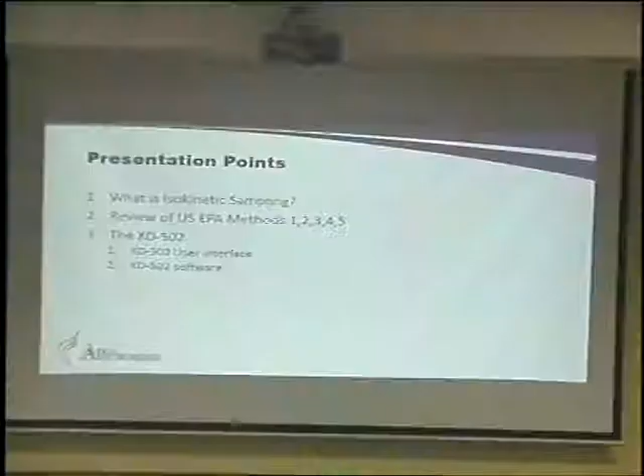So we can get started. For the first session this morning, I'll do my best to speak as clear and slow in English as possible, on the original Method 5 theories and practices. You must have a basic understanding of Method 1, 2, 3, 4, and 5 to be able to do more sampling, maybe Method 23 or 26A or 29, things like this. So we'll review those methods, and then we'll take a look at the new console we have in the back here, the 502, which is a small, light, compact version of our original manual sampling equipment that we have developed over many years with feedback from our customers all over the world, looking for new technology, new improvement on the equipment.

So first of all, let's talk about what isokinetic sampling is. To break down the word itself, ISO is uniform, or same, or equal to, and kinetic is pertaining to the motion, or in our case, the flow. So isokinetic sampling is basically matching our flow or suction with the instrument to the flow of the stack gas. Why do we do isokinetic sampling? It's to provide an unbiased representative sample of the particulate matter emitted from the source. So when we withdraw the gas at the same speed that it is flowing through the stack, we can then determine the total emission rate coming from that source.

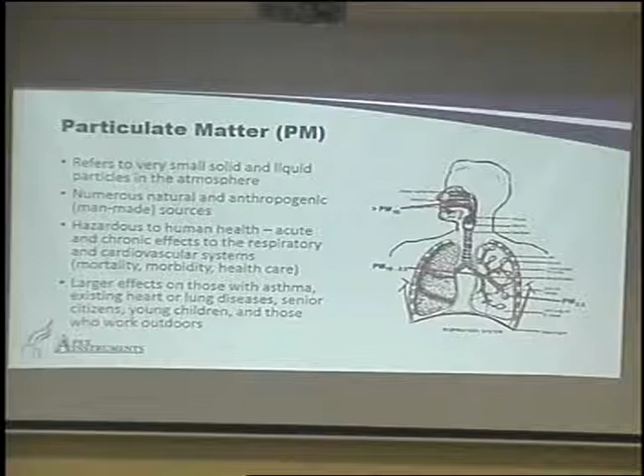So this helps generate pressure on industry and on the government to improve sampling regulation, to do more of it, to determine how we can lower that PM2.5 number. There are several sources where that may come from - maybe vehicles, maybe the burning of farmland when crops are changed, things like this. Obviously here in our industry, we're looking at stationary sources, chimneys, factories, things like this, that contribute to that PM2.5 factor. So we can talk about that a little bit later on.

So, isokinetic sampling - I won't go into the mathematics too much today. If you have any questions on the calculations, I'll be happy to answer it. But let's make sure we understand the theory and the topic today and what needs to be done for an accurate sample. The key is accuracy here, because if we're not taking an accurate sample, the data is meaningless, and then maybe we're making decisions on incorrect information, and we're not improving the situation as we think we would like to.

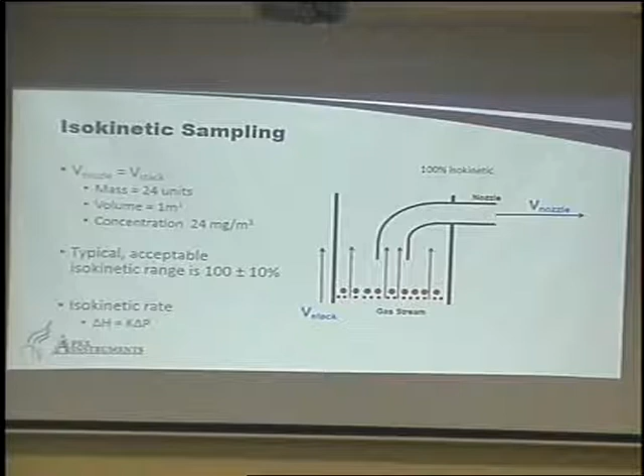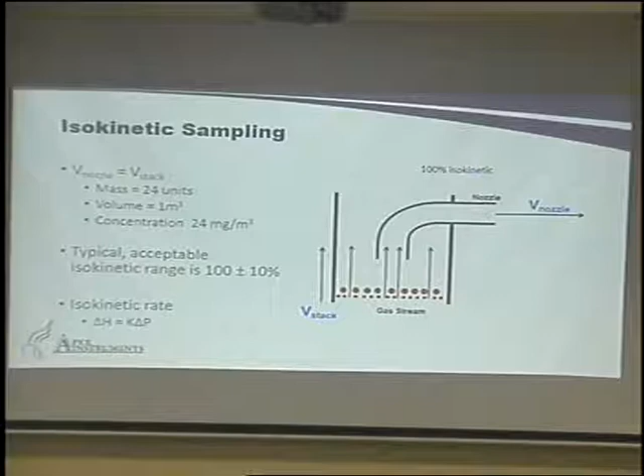So we're looking here at 100% isokinetic sampling. This represents our nozzle here on the end of the probe. Over here on our system, we match how much gas we suck into the nozzle with our pump. So we're going to draw our vacuum, and how much gas we pull into the nozzle here is going to equal how fast the gas is flowing past that nozzle, okay?

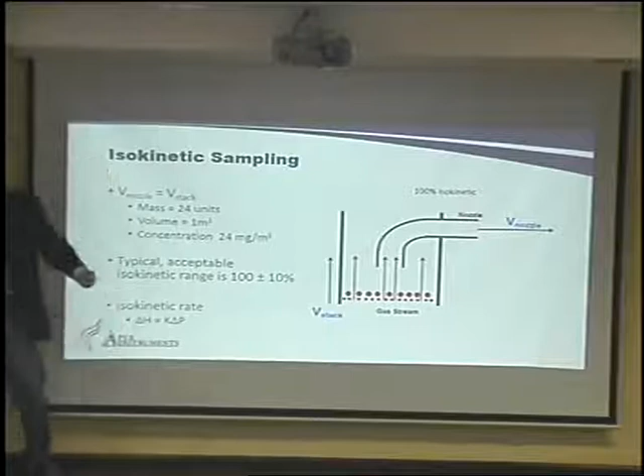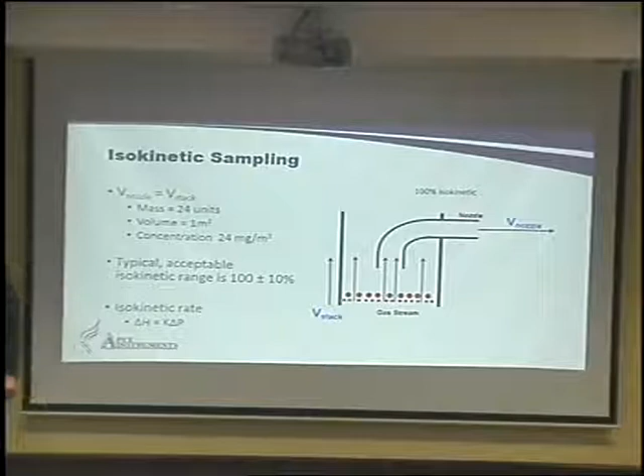And we're going to use several parameters to make sure this is accurate. Our pitot here reads how fast the gas is coming towards this. So we need to do all of our calculations. In the US EPA regulations, it says a valid test is - our isokinetic rate will be our delta H, which is the gas leaving the back of our gas meter. That is going to equal our K factor here, and the K factor is an equation about this long, taking into account our nozzle size and our humidity and pressure and things like this. And our delta P reading, which is the reading we take from our pitot tip on the front. Okay? That's how we're going to determine our isokinetics.

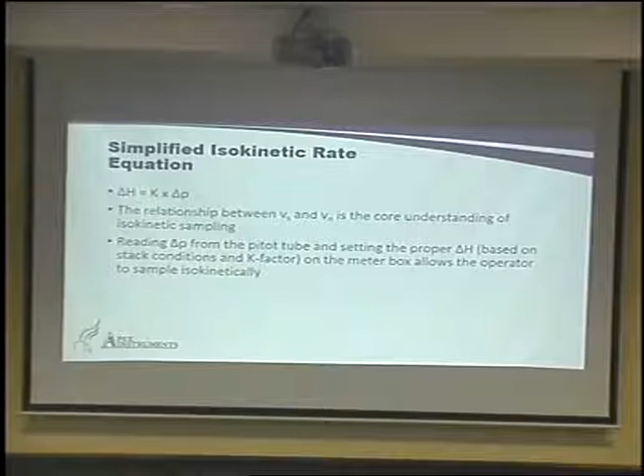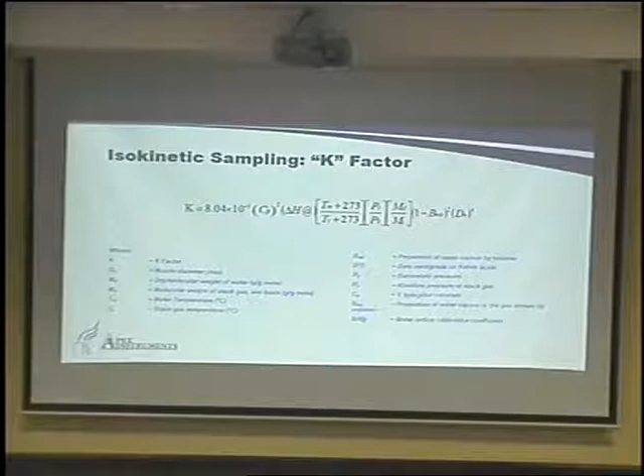So let's take a look now at what happens if we are not isokinetic, if we are not 100%. So if we are more than isokinetic, we're sucking in more gas faster than it is flowing through the stack. What tends to happen is - these represent the particles - they are typically pushed away from the nozzle as we're sucking harder and faster than we should be against the flow of the gas.

So if we're over isokinetic, we're pushing the dust around the nozzle like this. So now we're getting a smaller amount of dust in the nozzle than is actually in the gas. So now we're biasing our results on the low side. We're now going to report that there's less dust in the stack than there actually is.

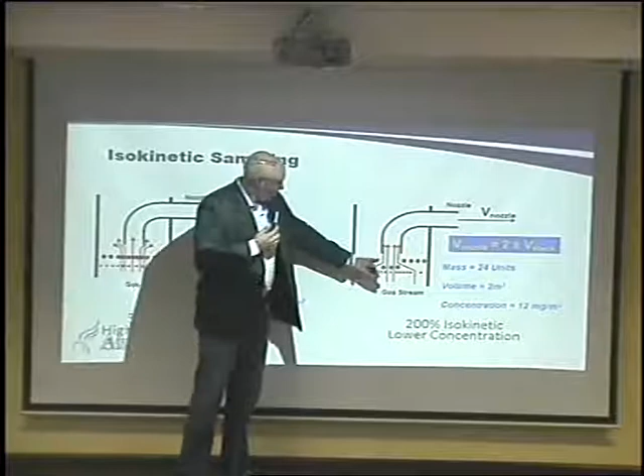On the reverse of that, if we're higher in our isokinetic rate, we're going to have a lower concentration reading of our stack, because what's going to happen is we're going to push some of the larger particles away and only collect smaller particles. It's not going to be a representation of all of the dust across the stack. So this shows the reasons why isokinetic sampling is key in getting an accurate representation of what is coming out of that stack.

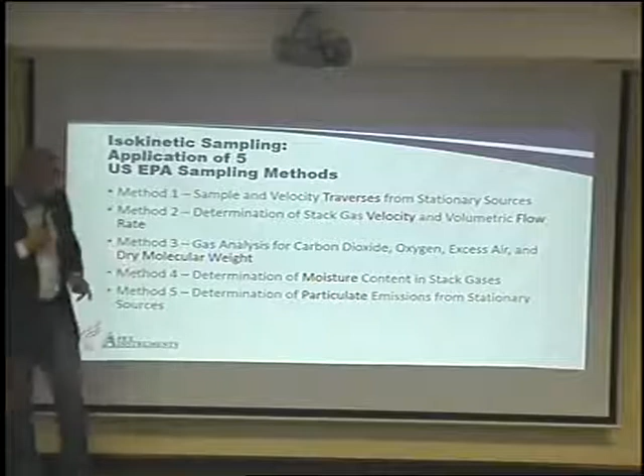So let's take a look at the methods, and then we'll look at them one by one really quickly. First is our Method 1, which is going to determine our sample and velocity traverses from a stationary source. It's going to help determine where on the stack we sample, and how many points across the stack we can sample.

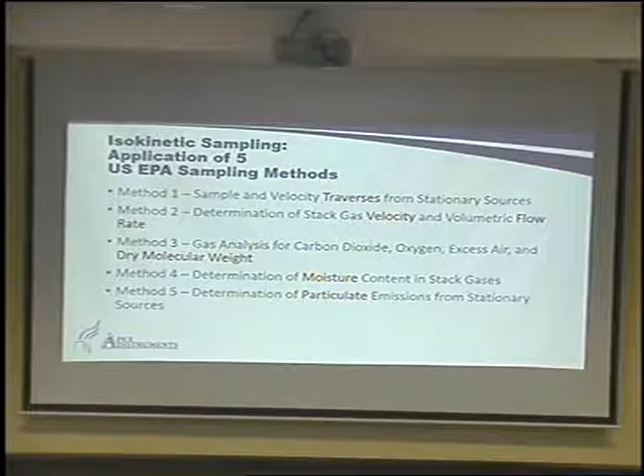Now, I travel to a lot of places around the world, and the facilities compared to some of the factories in Europe or US or whatever are much more challenging, let's say, in terms of access to the stack. Sometimes there's only one port that we can test, where at minimum we should be having two. Maybe the location of the port is not ideal. So in practical senses, I very much understand that sometimes there's unique challenges when you go into the field and actually do the testing in real life.

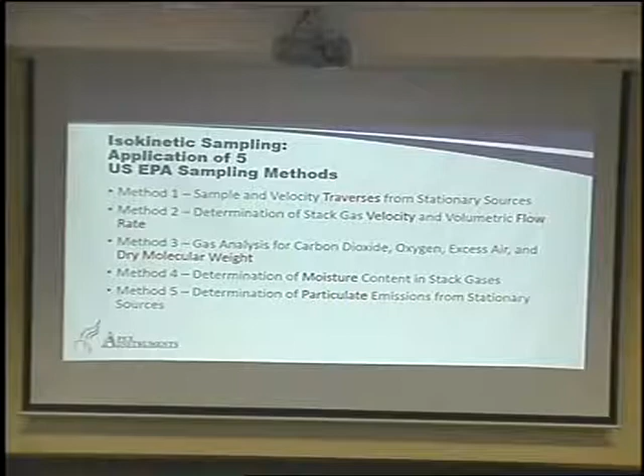But at least if we know the ideal situation, the best way to do our testing, if we have to make changes to that philosophy, to that testing parameter, we will know and we'll be able to share that with the customer or the government or whoever is looking at the results. We can share the changes that we've made with them so we can take into account maybe variations in the results that may not be quite as accurate as if it was a perfect situation.

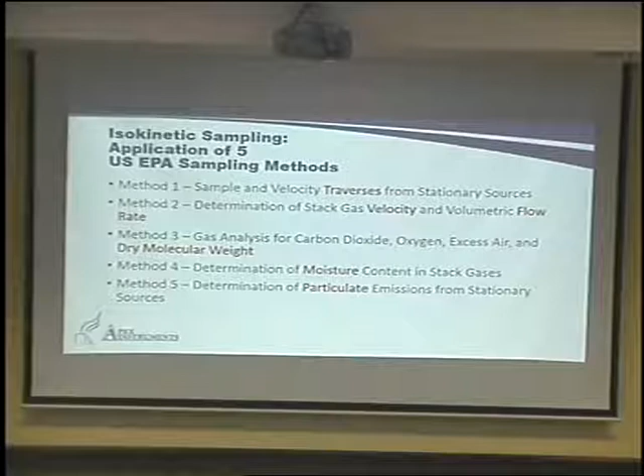The gas is actually moving, and our volumetric flow rate will help us pick and determine a nozzle size that will be the best for us to draw the sample through. Third is we're looking at our molecular weight. Again, all of these calculations - the reason we do this is it's information that we need for our K factor calculation to again determine our isokinetic sampling rate from our meter box.

Method 4 is determining our moisture content in the gas in the stack. And then finally, once we've done all that, we'll actually start testing and drawing a sample and pulling gas from the stack.

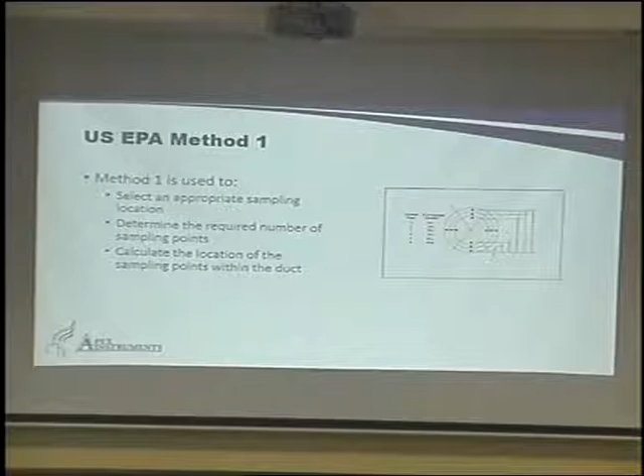So quickly, Method 1 - I'm sorry if you guys are familiar with this. I'm not sure who is not familiar in the room, but I think a good review is always nice, hopefully. So we're going to select our appropriate sampling location, determine the required numbers of traverse points across that stack, and then calculate the location of the sampling points within the stack, and then mark them appropriately on our probe so it makes it easy to sample while we're going through the process.

So some of the challenges for Method 1 is cyclonic or swirling gas flow. So if we've got a chimney and the gas is going like this, or bouncing back off the walls, it's going to be very difficult to get isokinetic sampling because the flow rate on this side might be very low and the flow rate over here might be very, very high. So it does make it difficult because maybe the instrument cannot suck hard enough on the high flow side, to determine a nozzle that will work for all parameters in the stack.

So that is a challenge, can be. The other is small 30 centimeter stacks that are quite small. Doing a cross-section, a traverse, is very difficult to do, just that it's such a small surface area - to move the probe just a couple of centimeters each time is not really representative of the stack and what we're looking for. So in that case, you would actually use Method 1A, which has variations approved by the EPA for these small kinds of stacks. I'm not sure the situation here in Thailand - are they typically big, small, somewhere in the middle, a bit of everything? I don't know, but it can be a challenge.

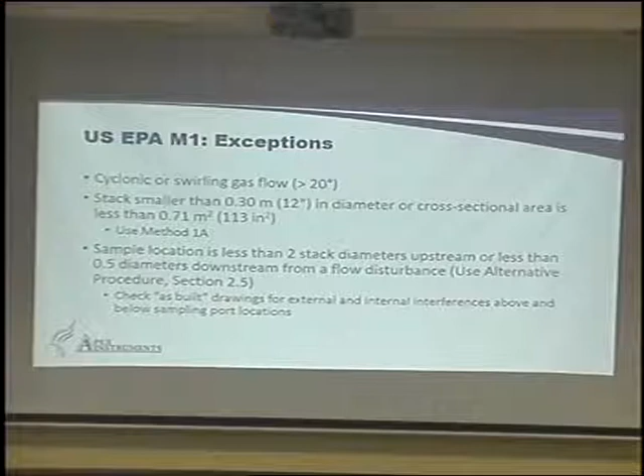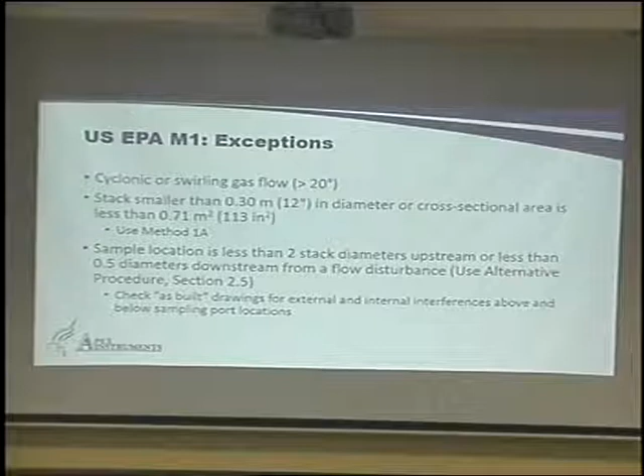So the sample location, we need time after the last disturbance, maybe a turn in the pipework or a fan, to allow the gas to change and get uniform across the stack. Just after a turn, the gas is going to bounce from each side, so you need time for it to settle down and come up smoothly, to help our isokinetic sampling rate be as close to 100% as possible.

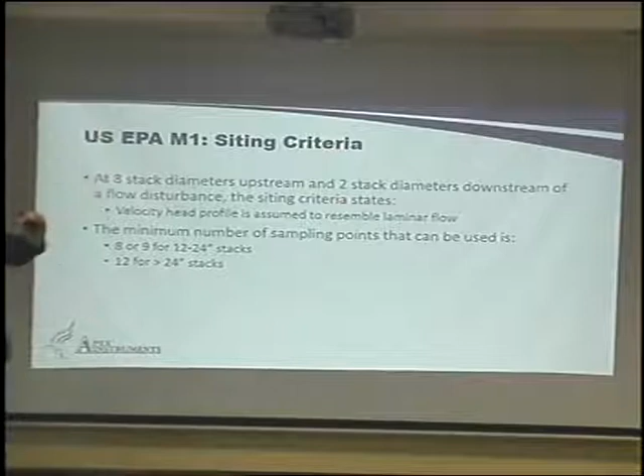Determining where we should be sampling on that stack, we should be at least 8 diameters from the last turn. So if we have a 1 meter stack in width, we should be at least 8 meters above the last disturbance, a turn, a fan, something like this. We should also be at least 2 stack diameters down from the exit point of our stack.

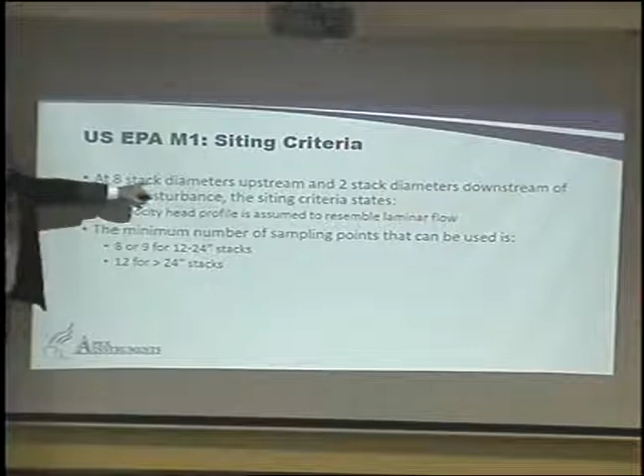The reason for the 8 diameters upstream is to allow the gas flow to get as uniform as possible on the stack. Coming 2 diameters down from the top ensures that we're not sucking in ambient gas from outside the stack that may be coming in from the top down into the gas. We don't want any ambient gas, we only want the gases coming from the factory or facility up the piping.

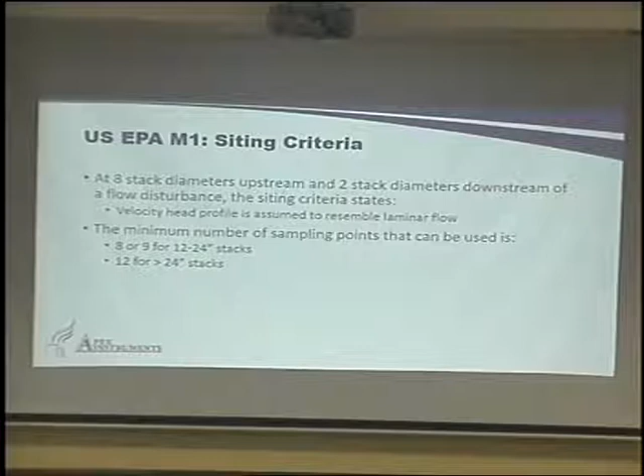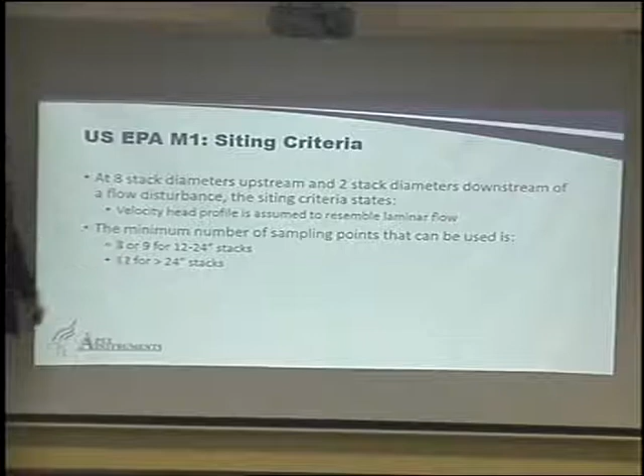So this is a little cheat for determining how many traverse or sampling points you have for how big the stack is. Really you're going to be choosing somewhere between 8 and 12 individual points to sample to get a representation of how much dust is coming out of that stack.

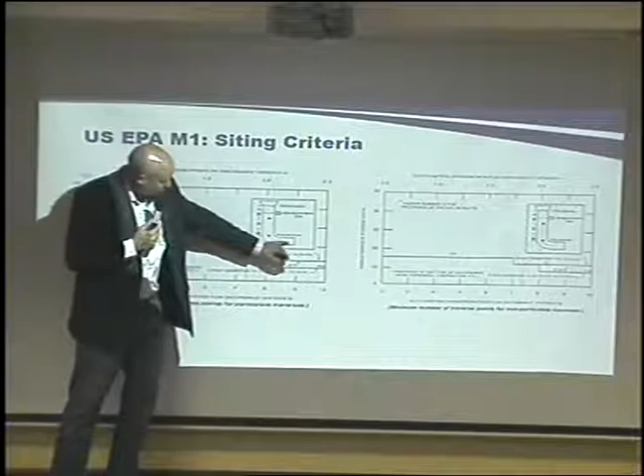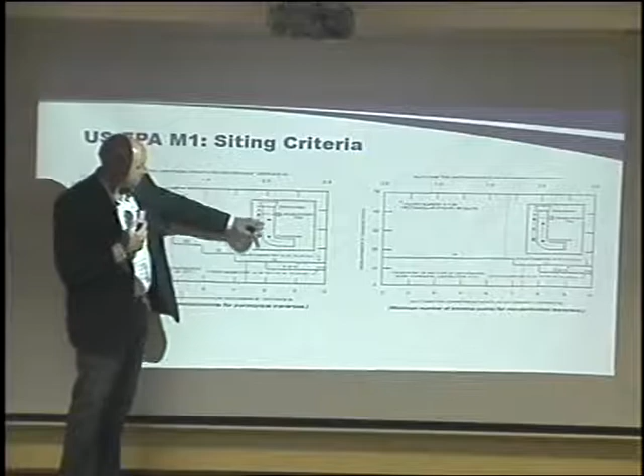So you can see here, this is showing the turn in our stack or duct, so we need to be 8 widths up the stack from there and at least 2 down from the top of our stack.

Sometimes it's not our choice where we can sample, we have to just use what the facility provides us. But if you have customers asking you where to put the portholes or the sampling location, you can help them determine the correct place using method 1, so in the future when you return to do more testing, you know you're doing the best possible job determining where you should be sampling.

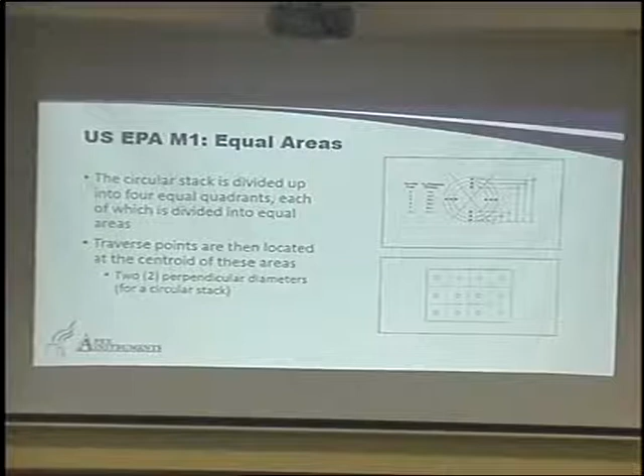So let's take a look at our areas. In a circular stack, which I'd think most of our sampling will be in, we're dividing the stack surface area into equal sections, like cutting a pie.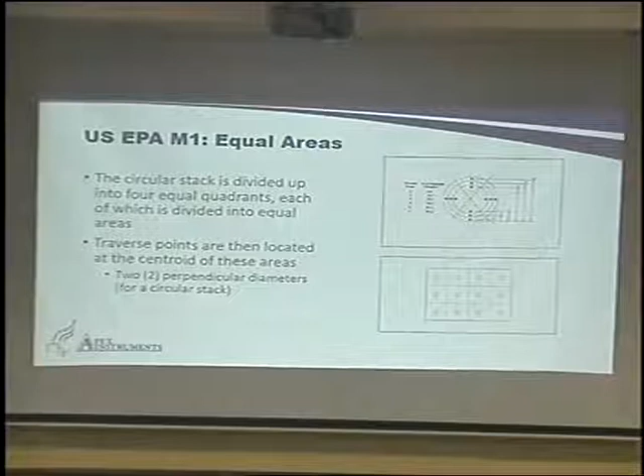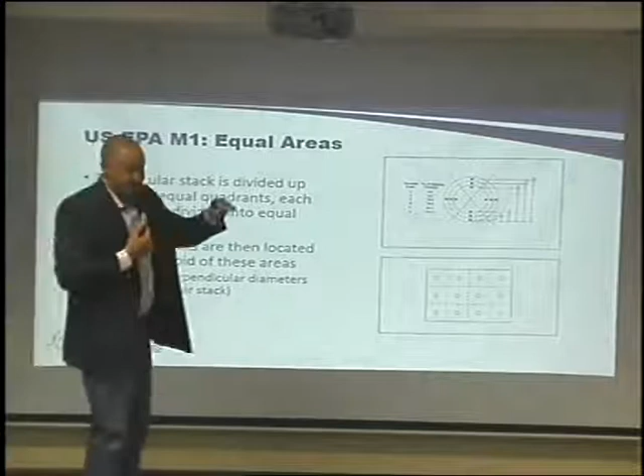In this particular stack, we're sampling 12 locations, and each of these particular areas are all equal surface areas. They're different shapes and sizes, but the total surface area is exactly the same for each point. Basically we're taking that cross-section of the stack and cutting it into equal pieces, so we know we're sampling on all equal pieces across the stack, giving us a representative sample of the dust coming out.

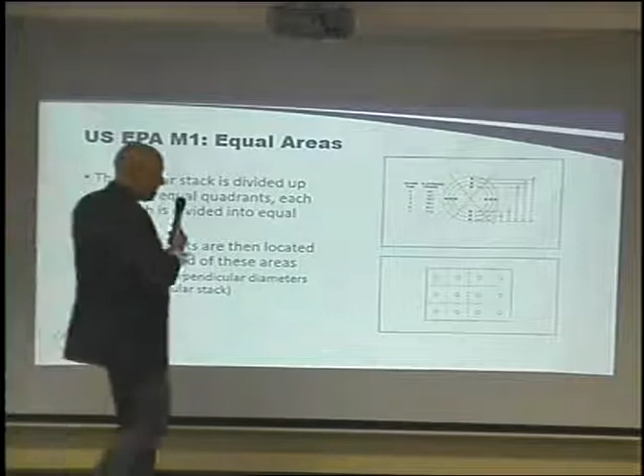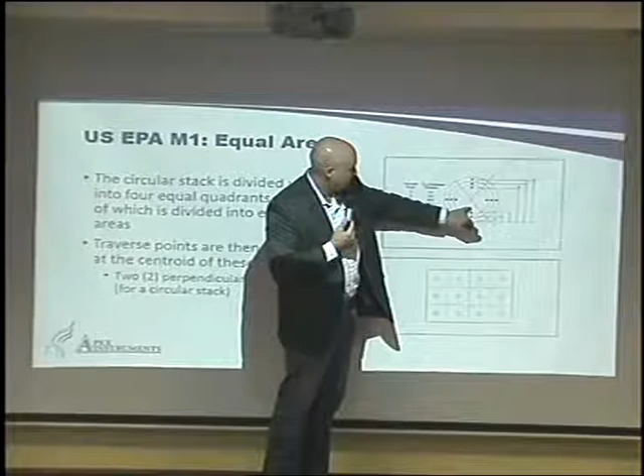You'll notice we never sample in the middle of the stack, we're always jumping across, because as we cut that piece of pie open, we sample in the middle of each of those pieces. So theoretically this sample point would be closer to the middle here, and same with this one, and this one, and this one. That's what we're determining during method one, where on those points we're going to sample, taking into account things like the width of the stack wall and the width of the porthole, to make sure we're only looking at the inside diameter of the stack.

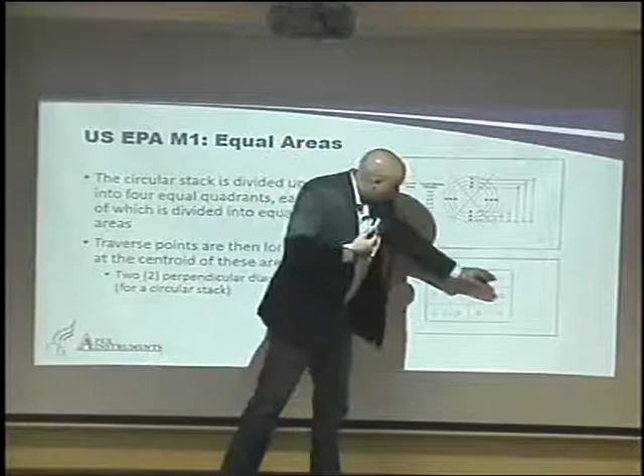And then on a square or rectangular stack, we're basically doing the same thing, just in a linear progression across the stack, cutting it into equal sections to be able to sample in the middle of each individual piece to get a representative sample.

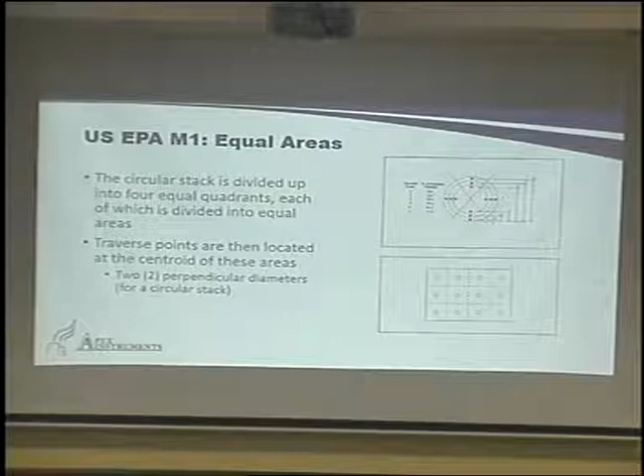So this is how you would, in practical terms, mark the probe. You've made your calculations, and you measure from the very tip, the very end of your nozzle, and start marking your traverse point measurements back. A little trick, you know the ceramic whiteout people used to put on paper when they made a mistake, the old typewriter days? That's a good tool to use, because it's ceramic so it won't come off in the heat, but it's easy to scratch off and make it disappear for your next job.

Most stack testers in the US have the little white bottle of whiteout, I'm not sure of another term for it. You can use that to mark your markings across your probe, so as you're coming out, it's a reference point for you, and you know where to stop when you're sampling each one of these points.

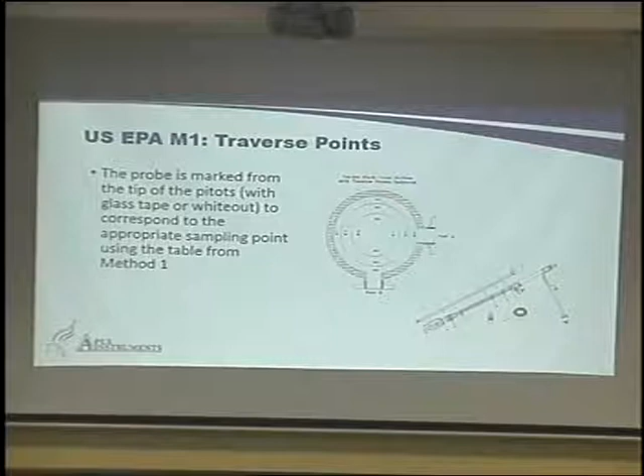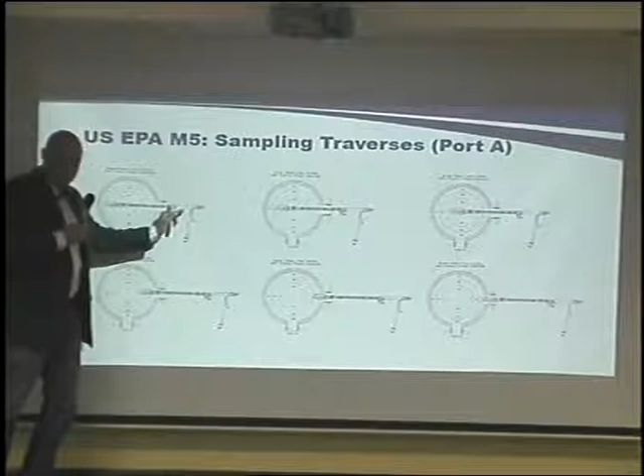As a point of reference, we always start all the way in the stack and come out as we traverse. So this would be our point one, and as the stack tester, you would have had the probe marked right here, so you'll see that on your port. As you pull out the probe, when you see your marking for point two, you stop.

You adjust your isokinetic sampling rate, because there will be a change in flow. Maybe it's very small, maybe it's very big. But what we'll do is wait for our delta P, which is our flow rate from our pitot, to stabilize. As we move, it's going to bounce and then come nice and steady. Then we'll multiply that by our K factor, and now we know how to adjust our console for our delta H number to get back to isokinetic sampling. So we must be looking at this every time we move the probe. We need to adjust our flow rate.

I've been to many countries where they don't do this. I'm not going to name any names, but they make an assumption, or an average. The problem is, on the average you might be close to 100% isokinetic, but maybe here you're up 50%, and here you're down 50%. We know from those previous slides, now we're sucking in more big particulate here, or pushing the particulate around the nozzle on this particular point. So we're not really getting a true sample of what's actually in the stack, which is important.

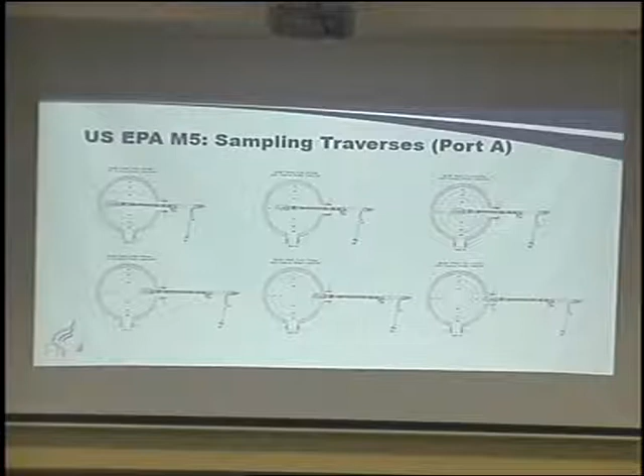And then you would do the same on port B, or the second port. In the ideal situation, you would have access to 4 ports, so you would sample 3, 3, 3, 3.

Does this ever happen in Thailand? Not very often. Do you at least get 2 ports? Always? 90%? Sometimes 1? Yeah, and again this is something that's out of our control.

We can ask our customer, is it possible to add a second port at a 90-degree right angle, then we could do our job correctly. If you only get 1 port, you do the best you can - you sample your 8 or your 12 points on the 1 port, but make sure you note in your report that you were only given access to 1 sample line.

Because again, how do we know if we have cyclonic flow and we're sampling directly across the stack here - 80% of the flow might be on this side, bouncing off the wall and coming back around. So maybe 80% of the particulate, the dust, is coming up this side of the stack, but we've just sampled straight across the middle. The emission rate's going to look great, pretty low, but maybe it's not a true representation of what's actually coming out at the top.

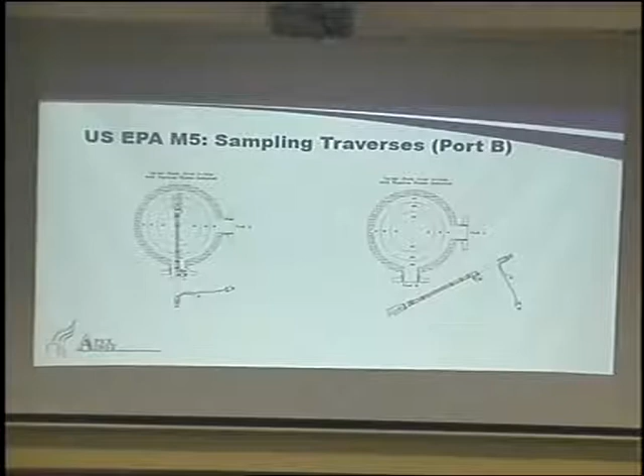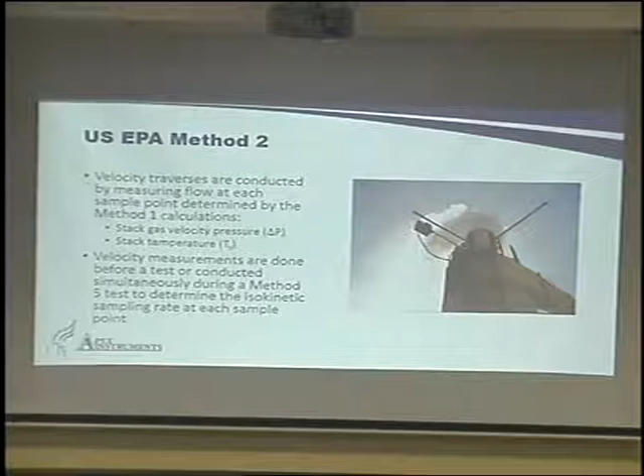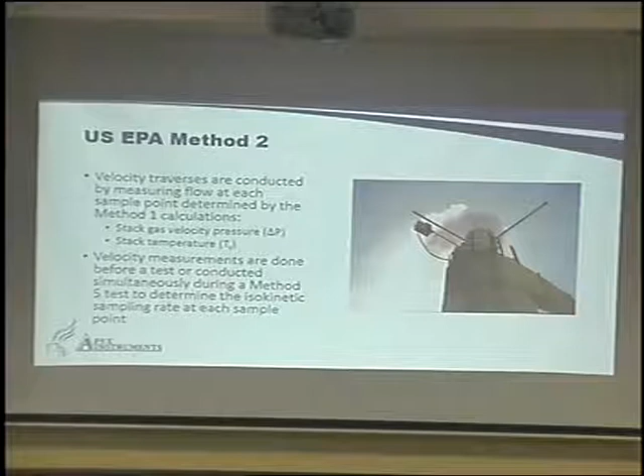So Method 2, we're determining our velocity. Without our nozzle on, we're going to use our S-type pitot to traverse across the stack, take our flow readings from our delta P number on the console, and get an average flow rate across the stack. What this is going to do is help us determine the best nozzle size to use, so we can draw that vacuum through the system and get as close to isokinetic sampling as we can.

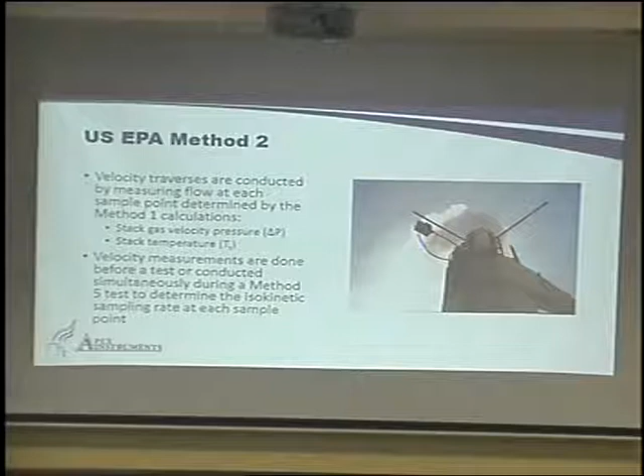So you'll see here that this is exactly the same as what we have over on the end of our probe, but this is our S-type pitot. This is our impact side, our negative side. It gives us a differential pressure and then gives us a reading of how fast that gas is coming up.

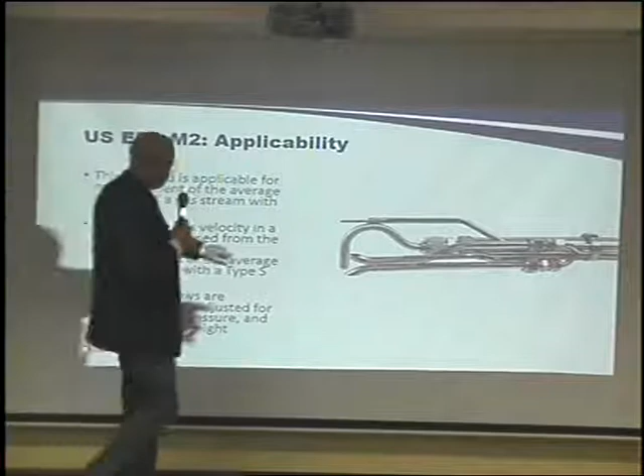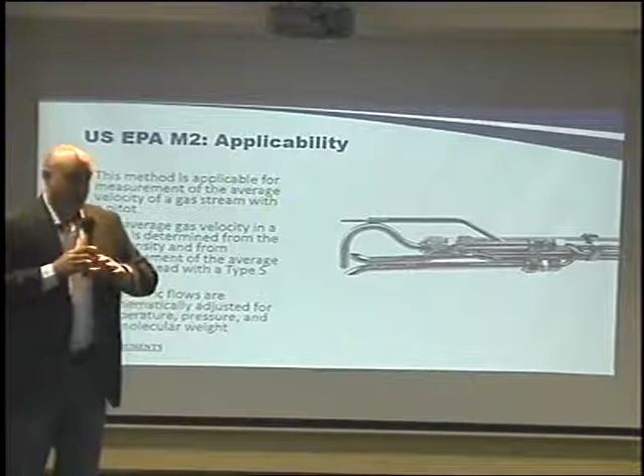Again, this will be missing on ours because we haven't determined the best nozzle size yet. So you can have no liner, no nozzle. And it's important to have no liner and no nozzle because you don't want to start collecting dust in there already.

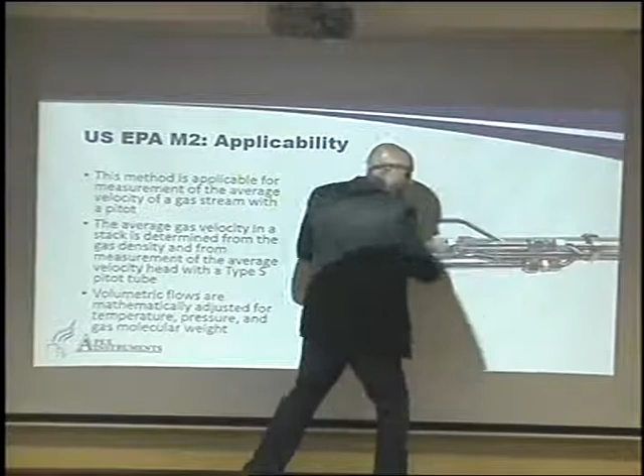Because you haven't started counting the amount of gas you're sampling. So even if you install your liner inside the probe and do your method 2 velocity traverse, you're going to start getting dust inside that liner. Now you're biasing your results high because you've started collecting dust that you're not accounting for in the gas flow. So no liner, no nozzle, do your traverse, do your calculations for your method 2, your flow rate.

And then we'll use that in our K-factor calculation. Again, this is our equation that we're going to use for our method 2. I'm not going to go into huge detail, but things we take into account are temperature, pressure, our molecular weight number, static pressure, barometric, things like this.

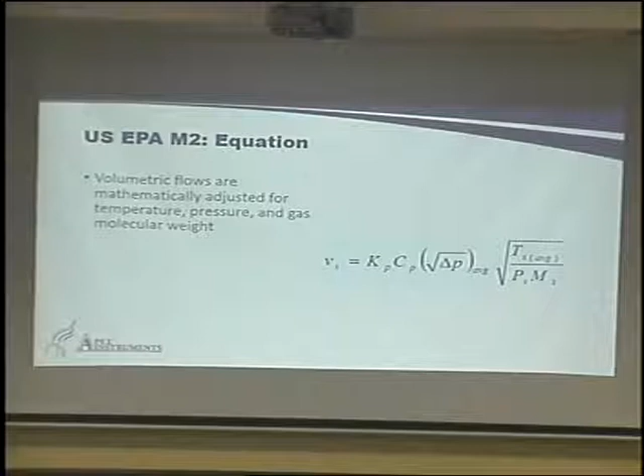Method 3 is determining our dry molecular weight of the gas. How heavy is it? Basically, the composition of the gas.

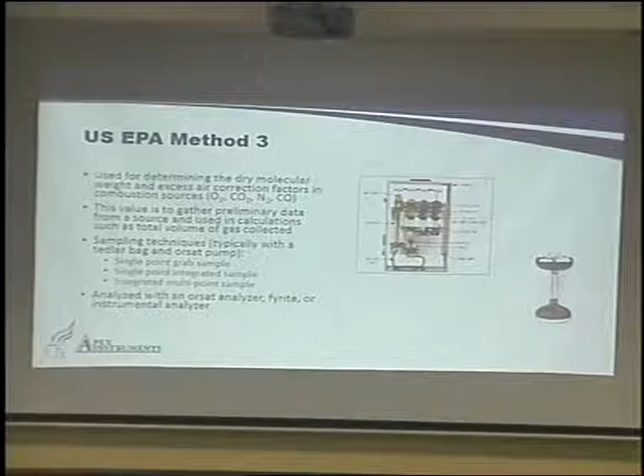Now, in some countries, you can use a flue gas analyzer to do this. Is this okay in Thailand? Okay, perfect. In the US, this is not acceptable.

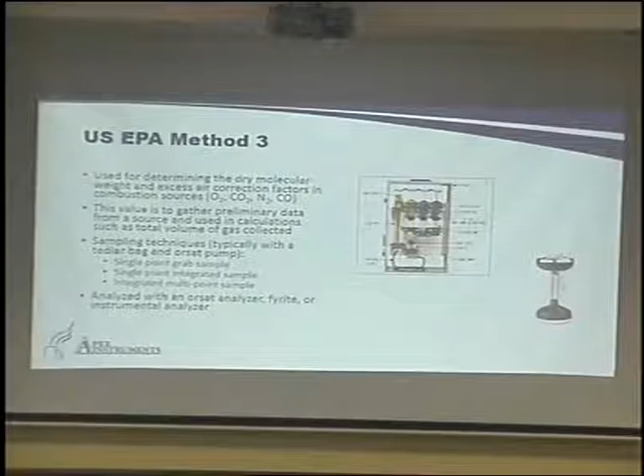You can use it for process monitoring. If you want to check CO or CO2 at the exit of your boiler, this is perfectly fine.

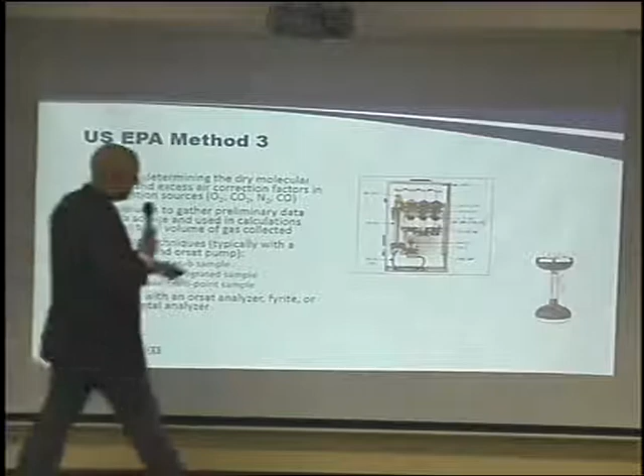But for reporting to the government, you must use an approved method from the EPA, which is either an ORSAT device like this or Fyrite, which is a small device like this, to determine our molecular weight.

So you guys have a distinct advantage here in Thailand to use a flue gas analyzer. It is acceptable in Europe as well and many other countries.

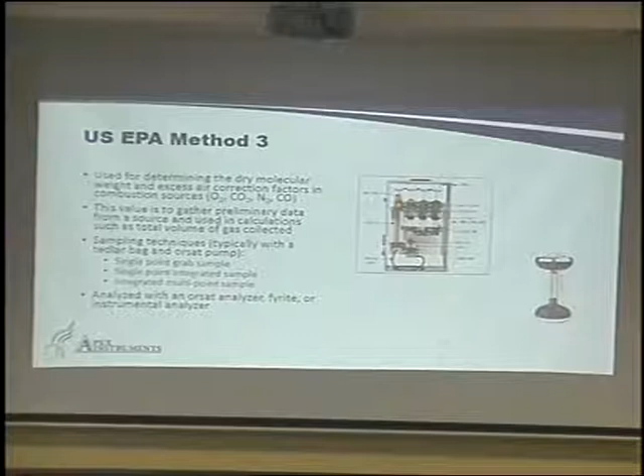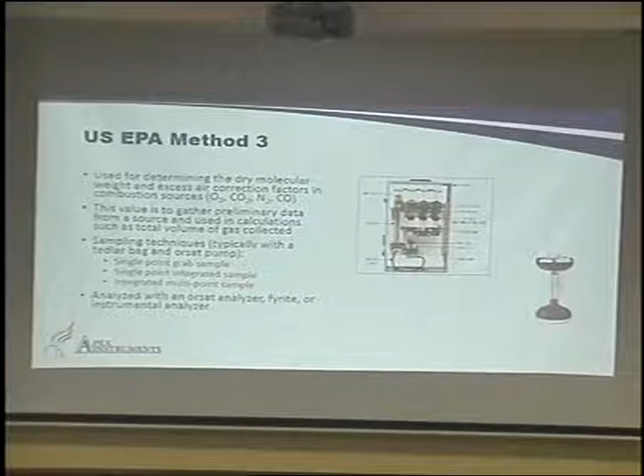Honestly, I just think the EPA is a little slow in picking up new technology. I think that's partly determined due to the budget at the US EPA right now. In some instances, they have a 5 or 10 year backlog of things they should be doing. So I don't think it's a reflection on the technology. I think it's just the time needed to get it approved.

So again, you're going to use your flue gas analyzer to get your gas values, which is going to help determine our molecular weight, again used in our K-factor calculation.

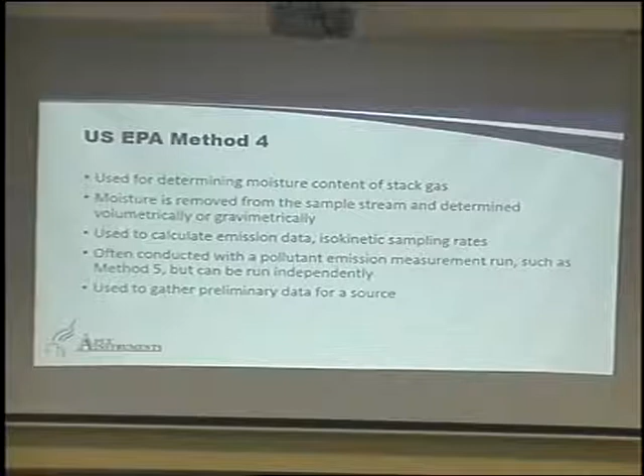And then our method 4 is determining the moisture. There are several ways we can do this. We can do it gravimetrically, so we can actually collect water in our impinger bottles in the glassware in the back, and then put it on a scale and measure how much water we've collected.

We can do what's called a wet bulb, dry bulb technique, where we put a thermometer in the stack with a dry piece of material over it. Then we put it in with a wet piece of material over it. And we have a scale that we can use to determine how much moisture is in the stack based on the variations of those two readings.

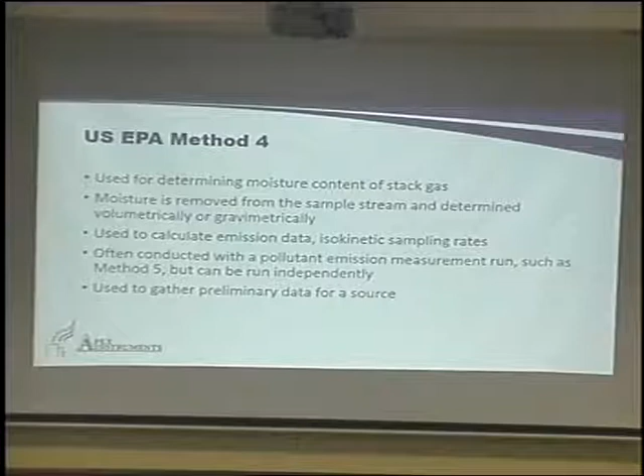And then in the US as well, if we have a moisture analyzer installed on the stack, like a moisture CEMS unit, we can use that value if the plant operation will give that to us.

Even many of my colleagues who've done this for many years can sometimes look at the stack and guess how much moisture is in there within a couple of percent, just from experience.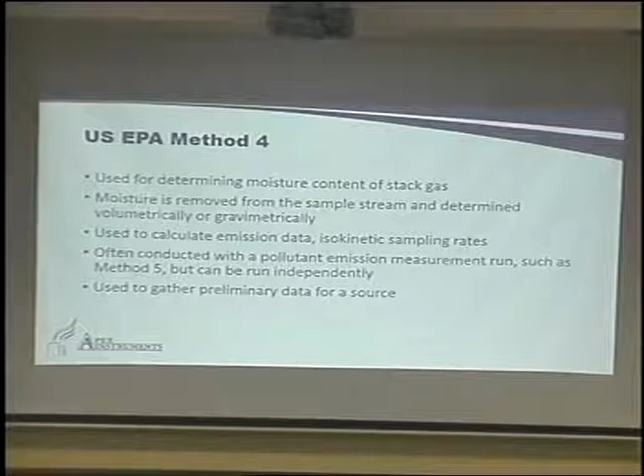And again, this is our moisture calculation for our method 4, which we're going to use again as inputs into our K-factor. And then we finally get to our method 5.

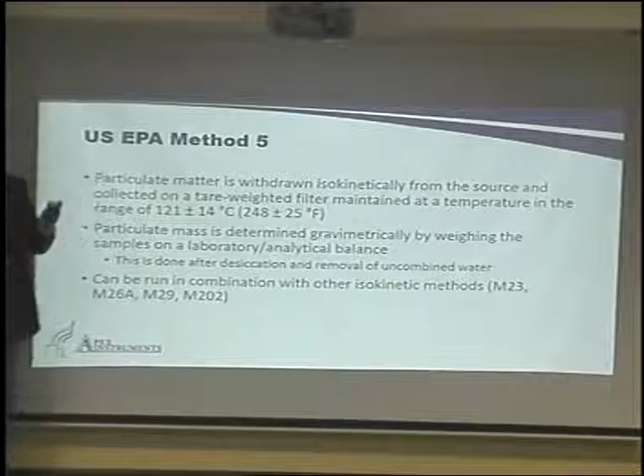And our method 5 is where we're going to draw our particulate matter from the source and collect it on our filter, which is in our heated sample box, which we maintain at a constant temperature, 121 above the dew point, keeping the moisture in the gas, plus or minus 14 degrees Celsius.

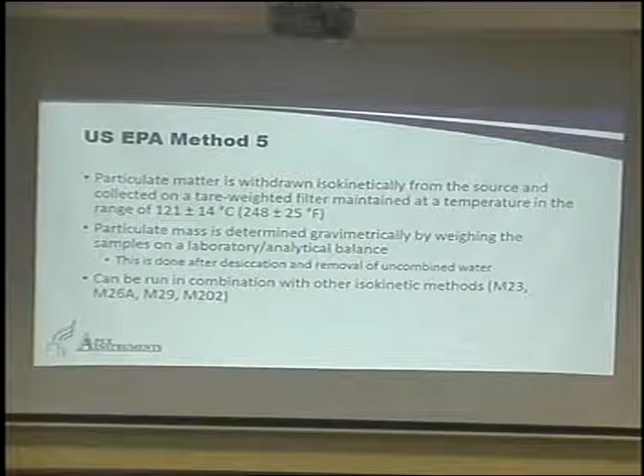On our Method 5, we've prepared the filter in the laboratory before we leave. I've been to countries where they go up on the stack, take a box of filters, pull it out with their bare hands, and put it in the holder. They've already contaminated the filter and added weight from their hands and the ambient air by not handling the sample correctly. It's very important to weigh the filter in the laboratory, put it in the glassware, and seal it off on both ends so it's completely sealed from the environment.

Once you get to the stack, you can install it and start pulling the gas through that material straight away. This is important. Again, it sounds very simple when you talk about it, and it makes perfect sense, but the practical application of doing this sometimes is not so strong. Once you explain it, people think, okay, now I understand, but they've never really thought through the process of why we do certain things to ensure we have a really accurate sample as best we can.

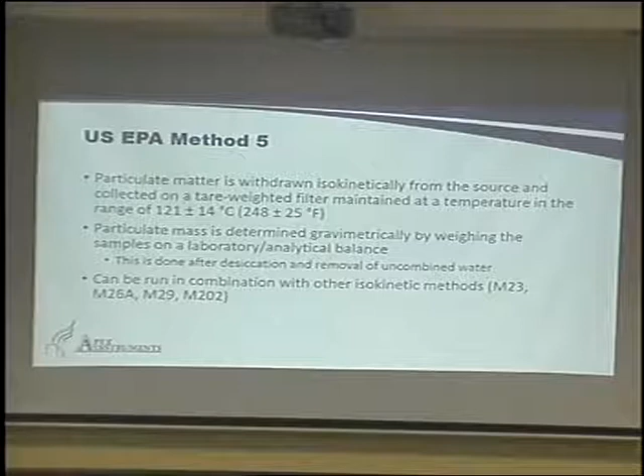We can do a basic Method 5 total PM dust test in combination with other methods like 23, 26A, 29 for metals, and 202, which is condensables. This may be something that might be coming up here in Thailand in the future. It's a very hot topic right now in China, this Method 202.

There's questions now that the condensable particulate, when it's hot and in the gas, acts like a gas—it may be invisible, but it acts like a gas. Once it enters into the atmosphere and the ambient air, it now condenses and turns into a solid. That solid is what China's looking at, whether it's contributing to their pollution problem. A typical Method 5 will not find this because it passes through the filter and into the impingers, so you're not collecting it.

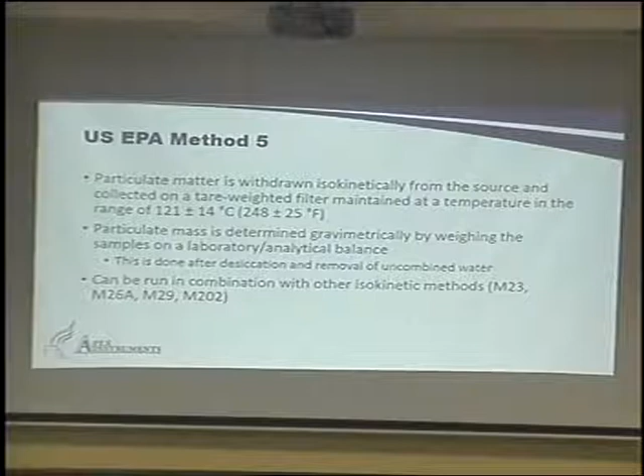So there is a method, 202, where you have two filters. You collect the total PM in the front, then you cool the sample like it would be in the ambient air, and you collect the new solid material that's changed from a gas to a solid on the second filter to determine the condensable particulates coming out of that.

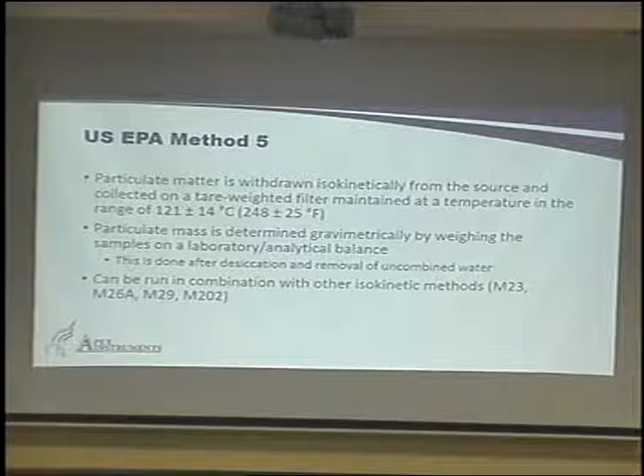So this is big in the US, big in China. Maybe it's something that might be coming here to Thailand as well, as the general population gets more educated and asks the questions—where is this PM2.5 coming from? You're telling me that every stack in Thailand has a low PM number. Where is it coming from? Maybe it's condensable particulate. We don't know.

So just some requirements from Method 5: typically 60 to 120 minutes for one run. In the US, you must do 3 complete runs, 3 brand new filters, 3 complete sampling trains. Is this the practice here in Thailand? Do you do 3, or just 1?

If you don't want to own up to me, that's fine. But in the US, it's 3 complete ones, so we can take all 3 values and plot them on a graph to make sure they're all close together. Maybe we have 2 here and an outlier, so we can determine if the high or low value of one run is due to incorrect sampling method—maybe the guy operating the box fell asleep or something—or maybe the process or facility changed something during the sampling run which changed our sample value. That's why we always, at least in the US, do 3 runs to make sure—if they're all bunched together and pretty close, I think we've got a good number. We did a good job.

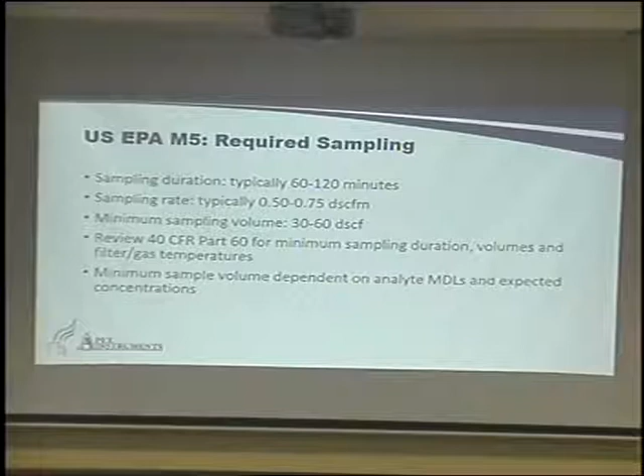So let's talk about the 502 now. How many of you guys know our manual sampling kit, the 572? You've seen it before. It's kind of our original product for isokinetic sampling. It's got the big 10-inch incline manometer on the front for our delta H and delta P values, an external pump, and it's quite a big unit.

As we went into new countries and regions, there were a lot of challenges in some parts of the world for getting access to the sample location on the stack. We're very fortunate in the US that most facilities either have an elevator that takes you to the top where you need to sample, with a nice big platform, sometimes even inside the annulus, so if it's snowing outside, you're safe and contained. But after visiting many locations in China and India and places like this, the facilities, at least for our part of the job, is not that great. So we tried to develop new technology to shrink the size of the unit, make it lighter and easier for you to take it on site and get up there, but still keep the accuracy.

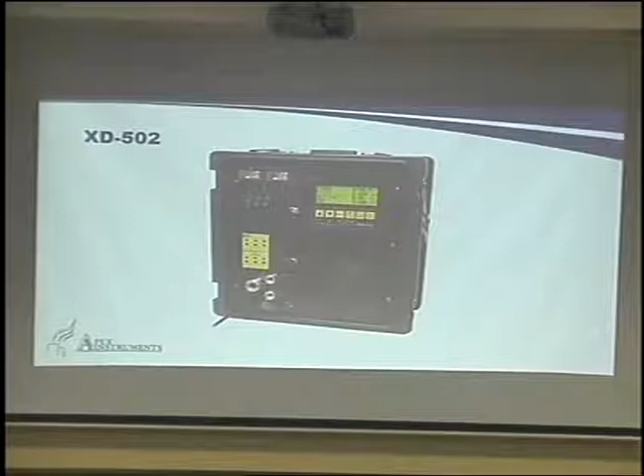So you can see here, this is our original box, and you would also need the pump to go with it, so you're looking at 2 pieces of equipment together. You can see the 502, which you guys can see in the back, is about half the size and half the weight. It's got an internal pump.

It also has a lot of features that the manual system doesn't have, like data acquisition. It's always recording the information for you that can be exported later and used for building your reports, so it cuts down on human error from manually writing down numbers and readings.

A lot of people don't realize that even small variations, like reading the liquid in this manometer - if you read it from here or from here, it's going to give you 2 different values. You must read it straight on. So even those small things in the manual system can change the numbers and start adding errors into our calculations.

Whereas our 502, it's all digitally displayed. The accuracy is much, much tighter and much, much better than our manual systems.

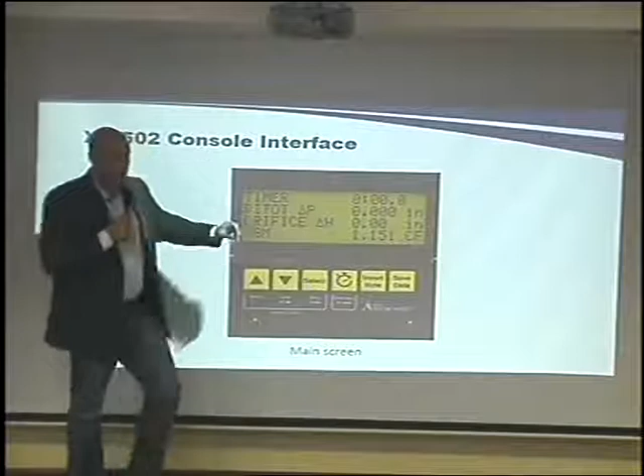You can see here, this would be the start, and I'm sure we can show anyone who wants a closer look at the instrument during the break. We're going to have our timer, our delta P, which is our reading from our pitot, and our orifice delta H that's coming off the back of our gas meter. You can see here that this is displaying in inches. We can change that to millimeters, or even change it to pascals in the software. It's all available, so metric units are no problem. And then our gas meter reading here.

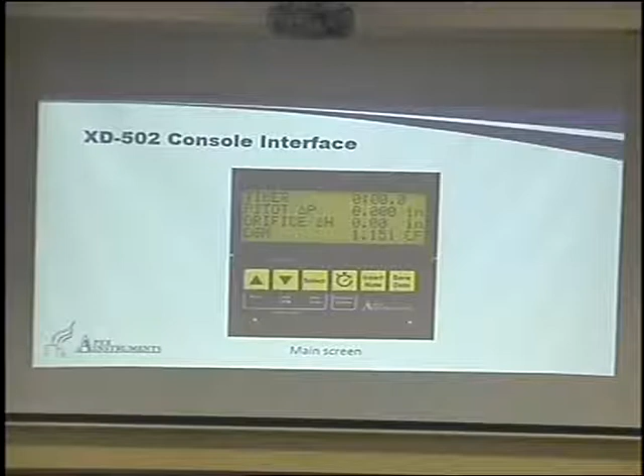Another advantage is we can see all of our temperatures, all of our thermocouples, instantly on one screen. Previously on the older model, you would have to select which one you want to read and it would only display one value at a time using the switch. Now we can take a quick look by pressing one button and see all of our thermocouple temperatures on one screen. Obviously the software continues to record all this information, but as a tester, you can quickly take a look and see if there's any problems.

Quickly take a look, and for some reason my oven temperature is only reading 100 degrees Celsius, where it should be 121 plus or minus 14. Outside of the method, maybe we need to stop and investigate, see what's going on. Is there a problem with the equipment, or is it exposed to some kind of cold ambient temperature? What's going on? So it allows us to get a quick snapshot to see what's happening.

Our vacuum, what time were we meant to? 10:30, okay. The next screen will show our vacuum, barometric pressure, time, our run, and our point. All this would be entered once you've done your isokinetic calculations. The system itself will know that we're on our first run of 3, hopefully, and on our first point, or our second point, or our third point, and it will record all of this information for you and export it.

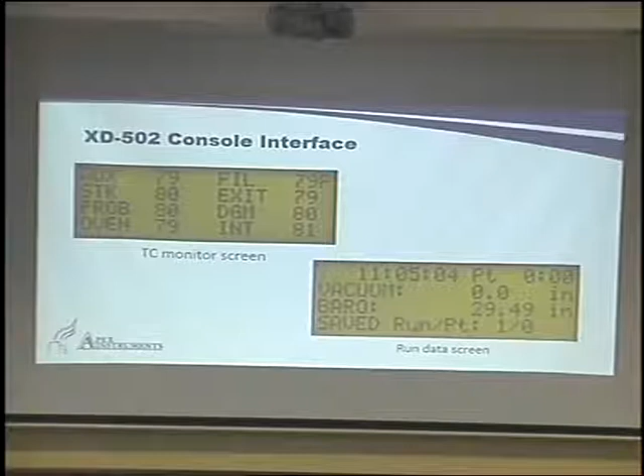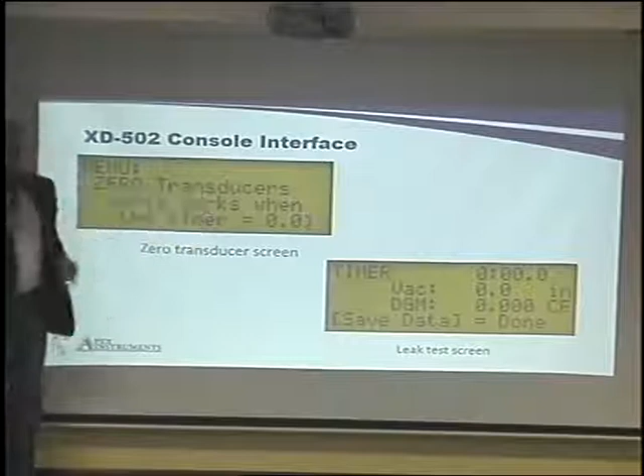Some of the features in kind of a sub-menu underneath our main screens - this is really for more servicing and operation. We can zero the pressure transducers. In the console, we're taking the pressure reading by these little microchips in the back, these little computer chips. Due to various things, whether it be barometric pressure, humidity, or temperature, they naturally drift a little bit.

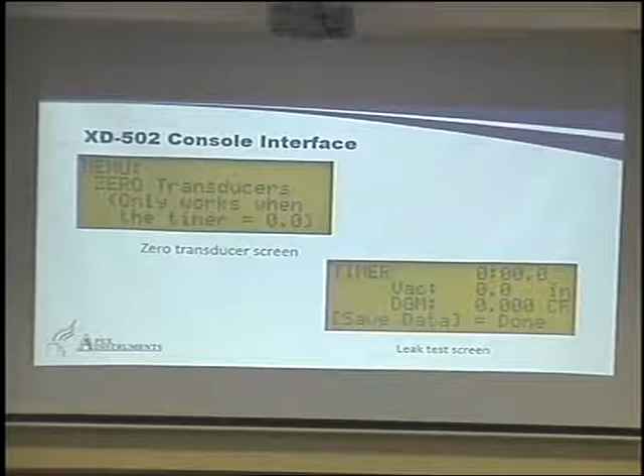So you might take a reading in a nice air-conditioned room like this, and it reads 0. But by the time you travel 3 or 4 hours...